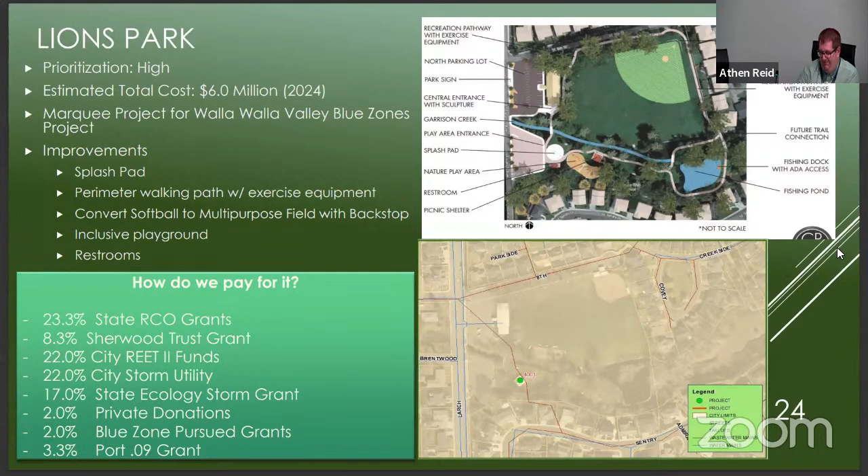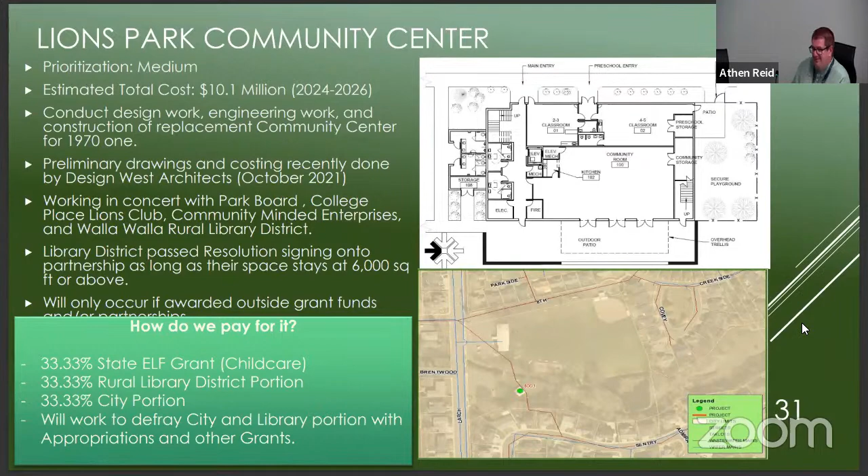Believe it or not, it looks like this is actually starting to come together with the various buckets of grant money. So that is the concept to replace the community center with something that really represents the current needs. Next slide.

Next slide. Then full corridor projects, this means the pavement's getting redone as well as the base, as well as a utility or two. Next slide.

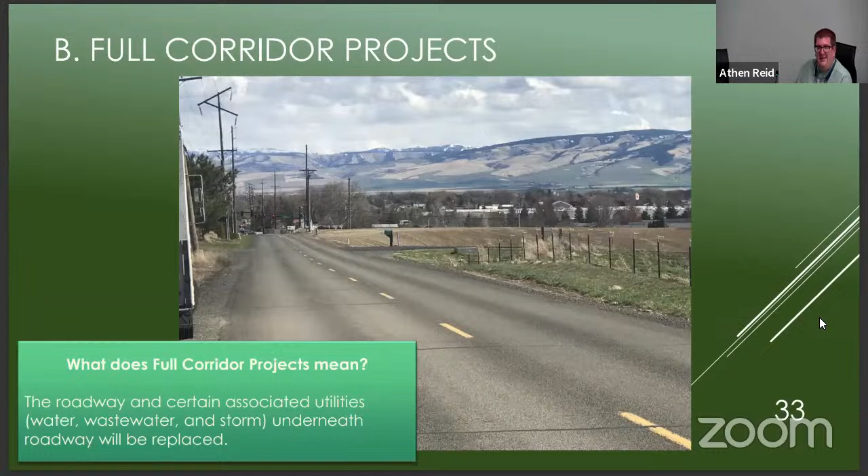Mojonnier Road, this is going to be the big heavy lift, and this one will be over the next 2 years. We're getting close to final engineering. We'll be teeing this up for right-of-way acquisition next year and to bid out construction. This will include normal travel lanes, curb and gutter, bike lanes, sidewalks, and some street lamps.

And then we're using some tax increment finance money, a surface transportation grant, and tying into the congressionally directed spending I mentioned earlier, we did get about $2.5 million earmarked from Representative McMorris Rodgers. So that'll come together over the next year or two. Next slide.

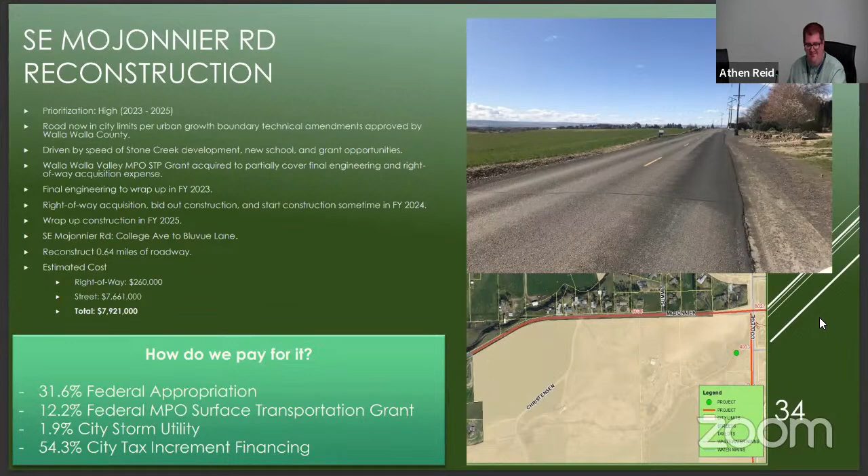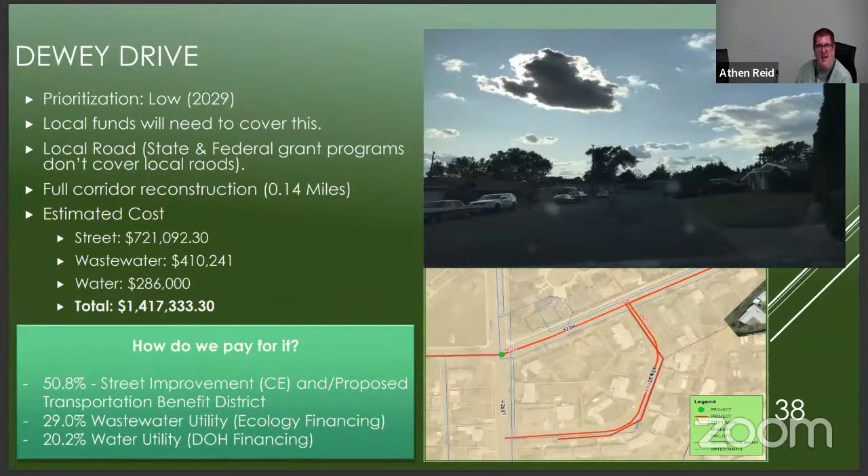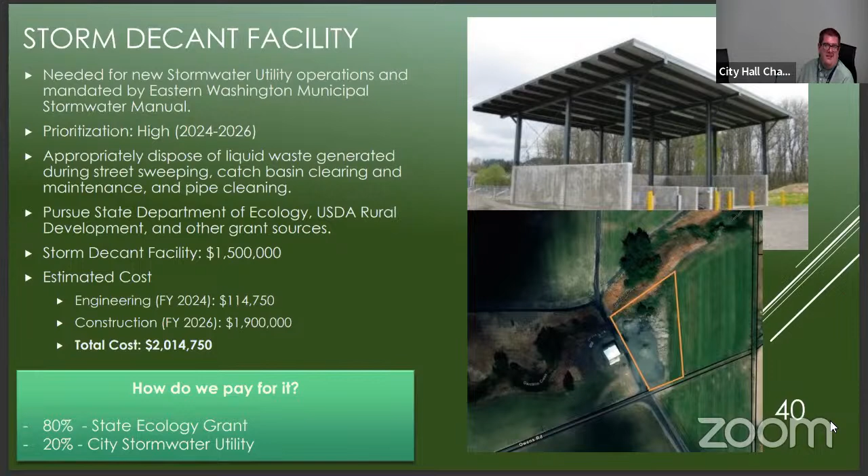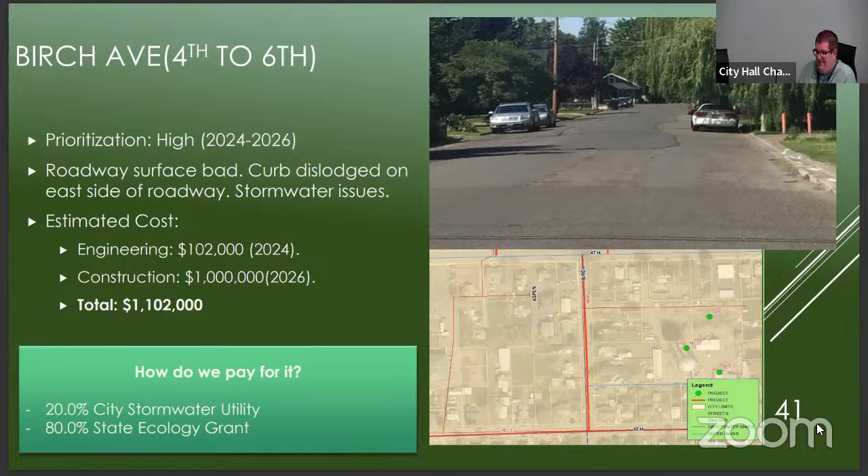Birch from 4th to 6th: engineering, we need to handle that, and then get to construction and put in sidewalk on that roadway as well. And then deal with some of the stormwater issues, because we have a creek that goes through folks' backyards and isn't properly mitigated at that roadway.

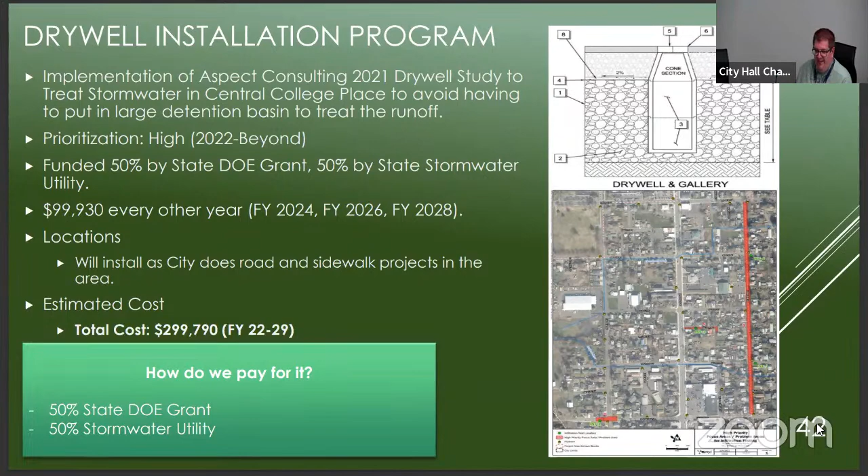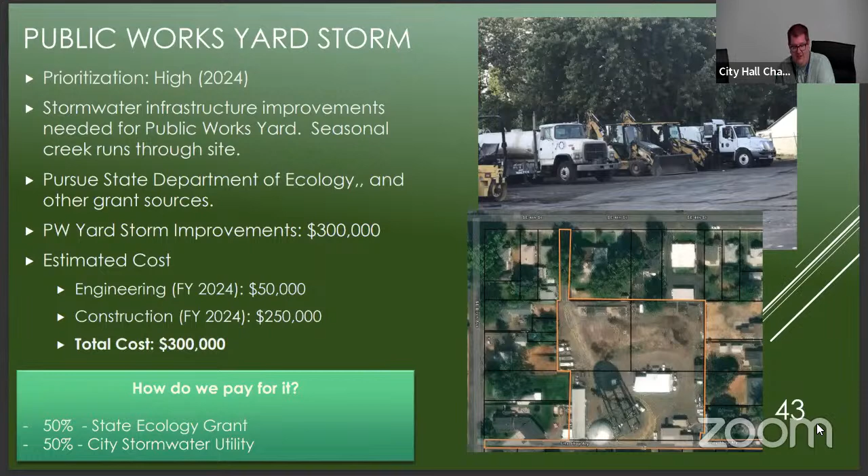For the Public Works Yard stormwater, this ties with Birch Street. This just needs to be treated—a lot of our heavy equipment is back there. So again, we're positioning this for next year to begin and remediate it.

Northwest Earl Lane: a couple of years ago, we redid Destito Court off of B Street, and we thought it was going to mitigate stormwater. However, we realized that a lot of stormwater is also coming from Earl, so this needs to be mitigated as well.

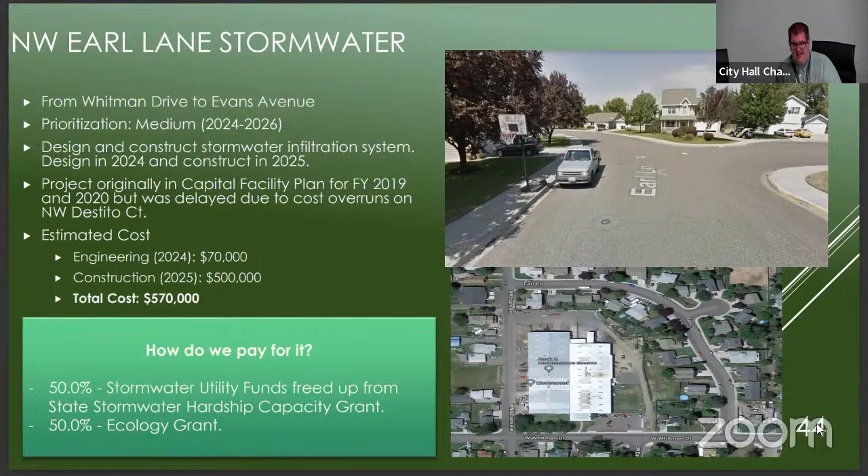And as you can see, we're getting a lot of grants for this project.

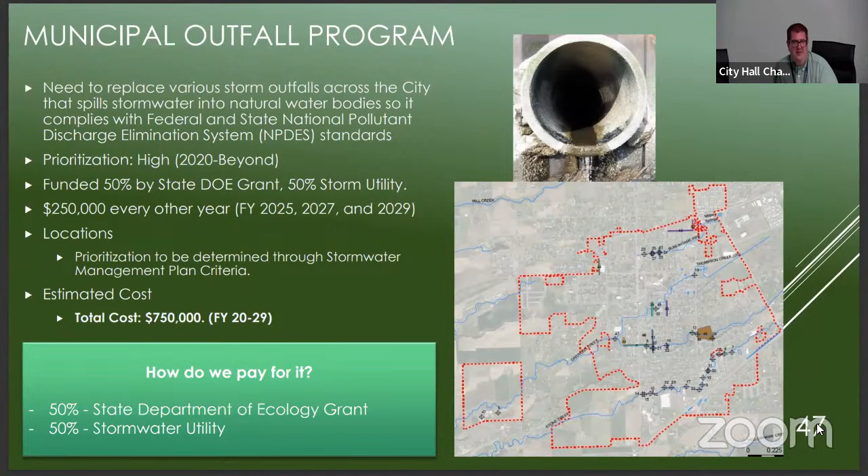Next slide. The outfall - we have roughly 80 outfalls across the city, and we're trying to get one every other year treated because the 80 outfalls didn't have filters on them, and they should have. So now we have a permit. We're trying to whittle that down every year, but they're expensive - each outfall is $250,000 to remediate.

Next. Now, street projects - this is mainly just dealing with pavement. Next slide. Chip seal - we put the rocky material on the roads, and we partner with the county to do this because we're able to get another 10 years of life out of them. We've done this as a stopgap because since we didn't really have a funding mechanism for streets, at least the local ones, they were at like a 260-year replacement schedule. So you do what you can to keep it going.

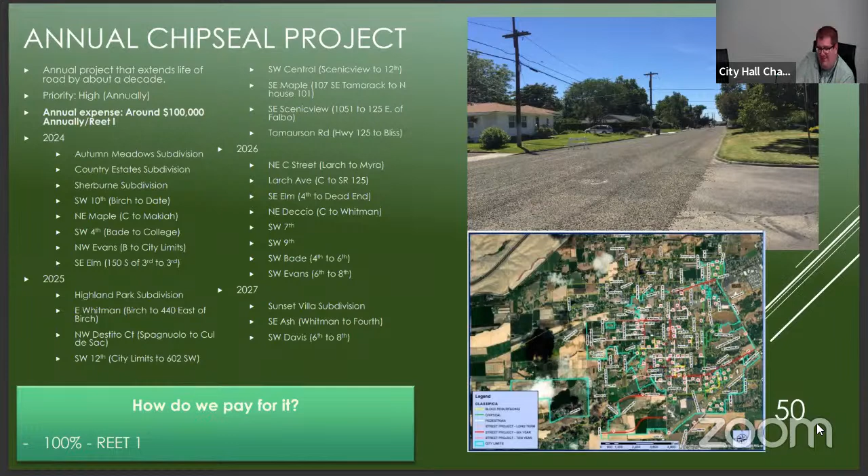So for 2024, you can see we would chip seal Autumn Meadows, Country Estates, south area of town. 2025 would be Highland Park area, and then Destito and Southwest 12th, Maple and Scenic View. 2026 would be Northeast C Street from Larch to Myra, the totality of the Larch corridor, and then Southwest 7th and 9th, and Bade and Evans. And then 2027 would be Sunset Villa, the manufactured housing park up there, and then Southeast Ash from Whitman 4th and Davis from 6th to 8th. And that's funded by our real estate excise tax 1.

Next slide. This block resurfacing program is predicated on a transportation benefit district revenue. We've had an unfunded one for a number of years. If it did pass, this would be a 1/10 of 1% sales tax, which is less than Walla Walla's 0.2%. But in this case, we would then start to actually whittle down some of these local roads that we're having problems replacing and fixing.

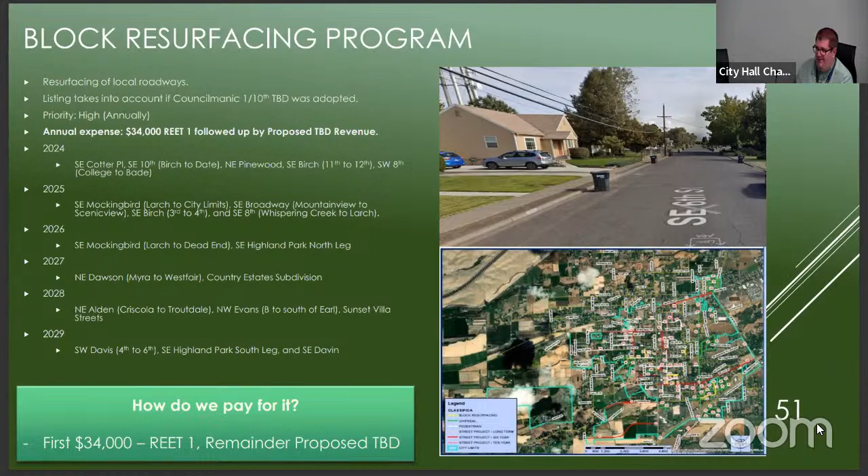So you can see in the cycle here, we have it where we have 1 or 2 blocks of streets we would reconstruct, and then another 1 or 2 blocks of streets we would engineer for the following year, and then essentially keep going in that fashion. You can see the estimated breakdown, and that's completed by a pavement management report that was done earlier in the year.

Next slide. Safe Walk College Place - this is the initiative to try to get sidewalks in the areas of town that have no sidewalk. So again, with the Transportation Benefit District, trying to use that as a local match to get some community development block grant funds, because the area around College Avenue between Academy Way, Birch, Rose Street, and Sunny is actually deemed low moderate income by HUD. And then you can actually get community development block grant money to do projects.

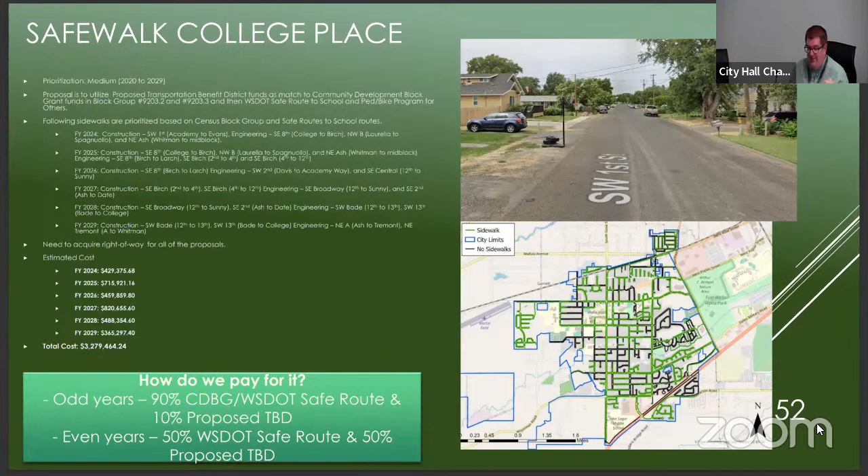So you'll see here that in essence, all these projects are scheduled where, again, we're trying to tee up a block of road for a sidewalk on one side - construction - and then a block of road for engineering, and keep going along that. Next slide.

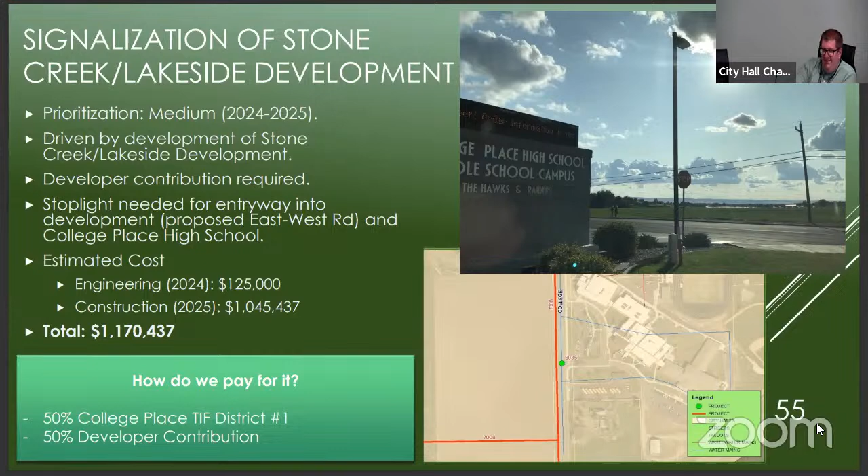Signalization of Stone Creek. With that new development going in across from the high school, that's actually going to facilitate another east-west road to go across that property. We'll be partnering with the developer, but that road's going to have to be a little oversized because the public school district bought land to the far southwest, and it looks like they eventually want to do some sort of intermediate school out there. So there is some exposure on that, which is why we have tax increment financing helping to pay for a portion of it.

The east-west road—you can see the bottom part of that map. There's the road that goes from east to west and it would connect all the development together. The developer is going to be building the majority of it, but since some of it has to be oversized for the eventual new school and potential commercial development, that's why tax increment financing is paying for some of that. We estimate that putting this in early matters, because a lot of the little roads would be built off of it, their expense coming years later. That's why the east-west road has to go in early.

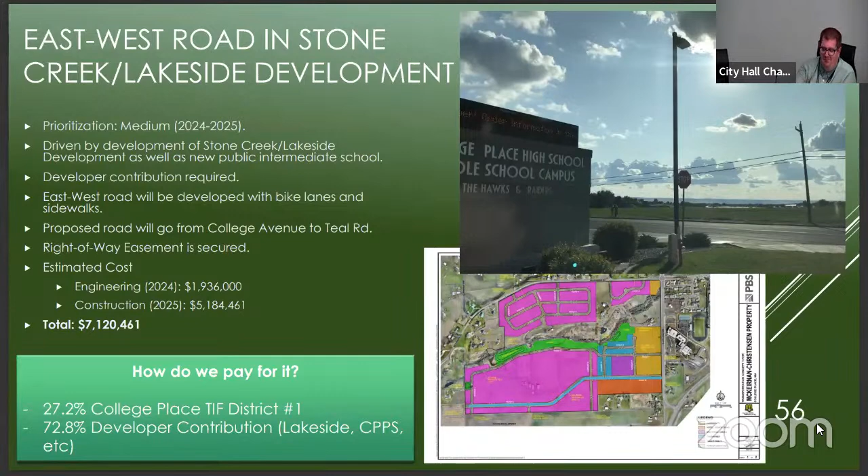We're also getting some out-of-cycle grant money from the state to fix up roads between Carey Court and Lambert, because next year the city of Walla Walla is doing a road diet on their portion of Rose Street. You'd have a situation where it would go from 3 lanes and bike lanes to 4 lanes, then back to 3 lanes with a multi-use path. So instead, we're going to try to make it one fluid sequence between the two jurisdictions.

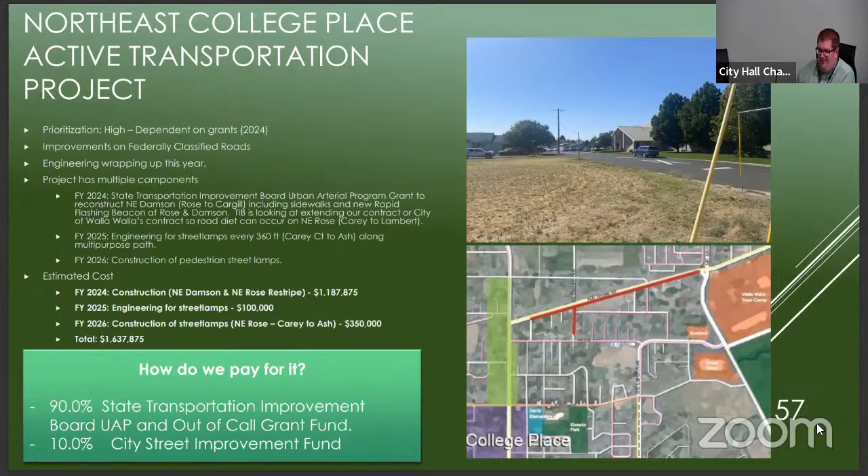And then Public Works yard replacement—again, we're just starting to investigate this.

So we're doing a facility study, and then a couple of years out, trying to get grant money and make it happen. When the older generation worked in Public Works, you could have facilities that were very old, but now it's hard to retain folks because some of the buildings out there predate the city being incorporated, and it's actually converted chicken coops. The Public Works folks are working out of it, that yard under the water tower.

And then Autumn Meadows, getting those roads up to city standard now that that subdivision adopted the local improvement district, so we could take it over as public roads.

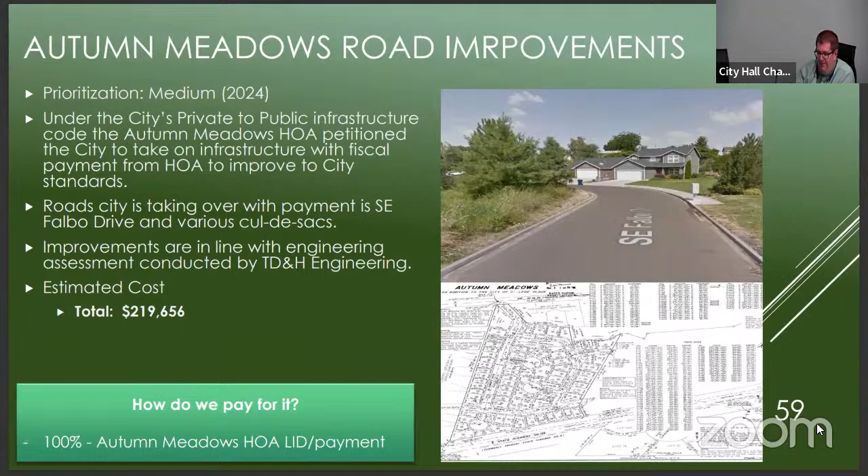And then Ash, we're doing a study on the other that will go on through 2024, figure out how maybe better reconfigure it with all the activity from the university and Davis School.

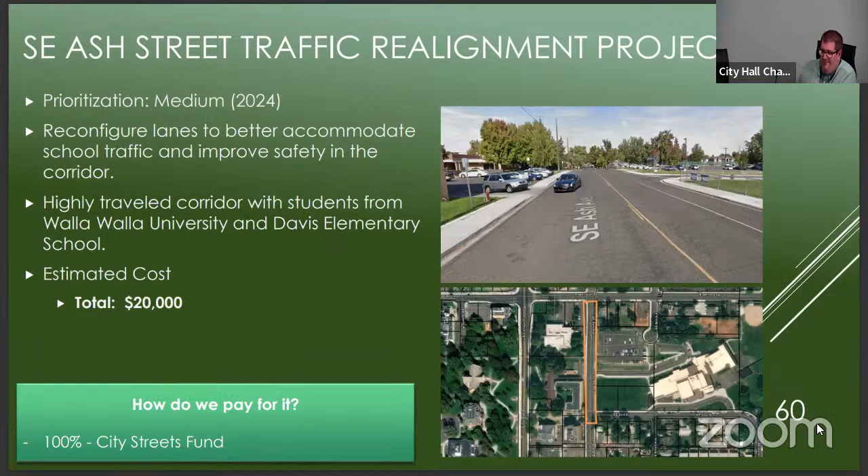And then Lambert and College, we're trying to earmark some money to put a guardrail up at Lambert and College Avenue, because over the years, through various accidents, a number of vehicles have gone at or over the retaining wall over there, and we just had another one, so it's going to be a major issue.

And then Whitman Home Depot, this is a newer project, but Myra Road, we don't own Myra Road from Rose to State Route 125. The city of Walla Walla does.

And there's a potential development going on the property south of Home Depot, but it needs a right turn in and right turn out. And our neighboring jurisdiction is politely squeezing us a little bit on that, so we may need to look at alternate options.

One option is to put a traffic circle in at that back entrance of Home Depot, because the problem is the entryway going to that property across from Home Depot right now is a pork chop, so it doesn't facilitate full movement. This is a newer project, but we put it in because otherwise that deal could potentially go south, and really, unless we get some additional movement in there, getting development on that property is a challenge.

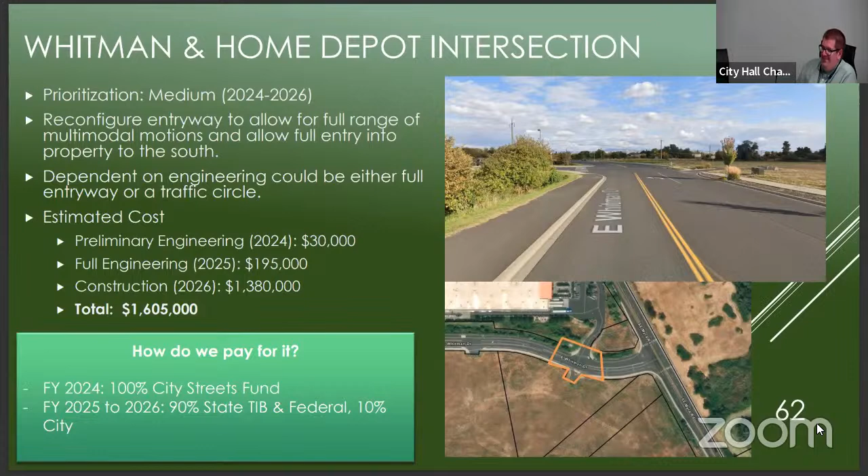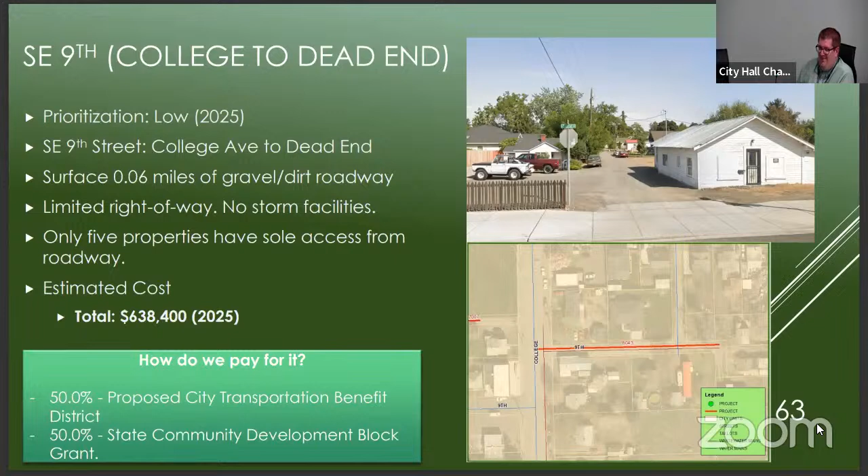Southeast Ninth, again, trying to program some transportation benefit district money and match it with CDBG money. This is the only unpaved road in the city, and it has rock and dirt in it. So we're actually trying to put a paved surface in there. It's right off of College Avenue.

Then Garrison, Village Way, and Myra Road. We've been getting a lot of requests over the years, given the number of residents in the villages and folks trying to get to Fort Walla Walla Park, to facilitate safer movement across Myra Road. So we're trying to work with our neighbors to get some grants and input a stoplight or something to facilitate safer movement around that area. So we have that in coming years, just because of where it's at, it's a bit of a challenge to get grants for it, but nonetheless, we will try.

This one is important really recently. It wasn't as important back when Homestead wasn't around in the county and didn't have that multi-use path going out to Whitman Mission. But now that it does, Whitman Drive's getting a ton of traffic, and that multi-use path is starting to be more and more important. So there's a 1.5 block portion that has no multi-use path, bordered by areas that do.

We did get a grant to do engineering and some right-of-way acquisition on Whitman between Davis and Academy Way, because half that block just ends and then there's nothing. So we're trying to position us so we could get additional grants to fill the gap and have a nice multi-use path the whole way from Myra and Fort Walla Walla to Whitman Mission.

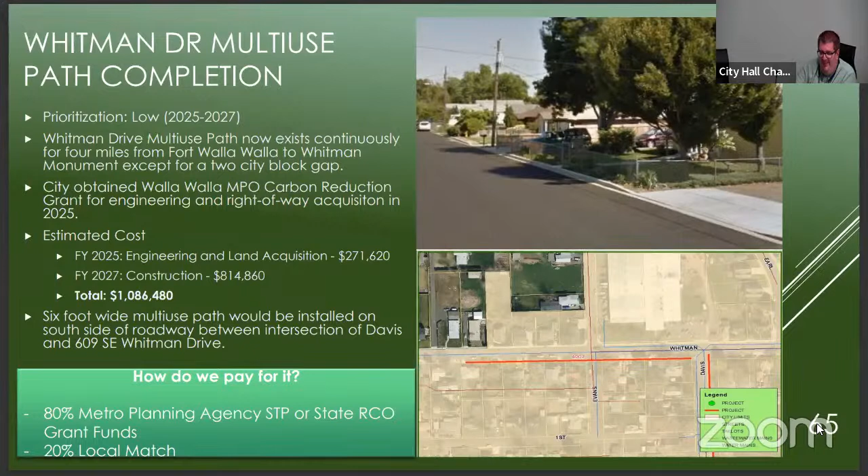And then Whitman Drive improvements. When the south half of the roadway was improved, that was done at Hayden Homes' expense, but then the north side was the old county chip seal, and it's starting to deteriorate.

So trying to do a full scale replacement of everything a couple years out, and it may be bumped up as stuff happens out by Martin Airfield and also future grants.

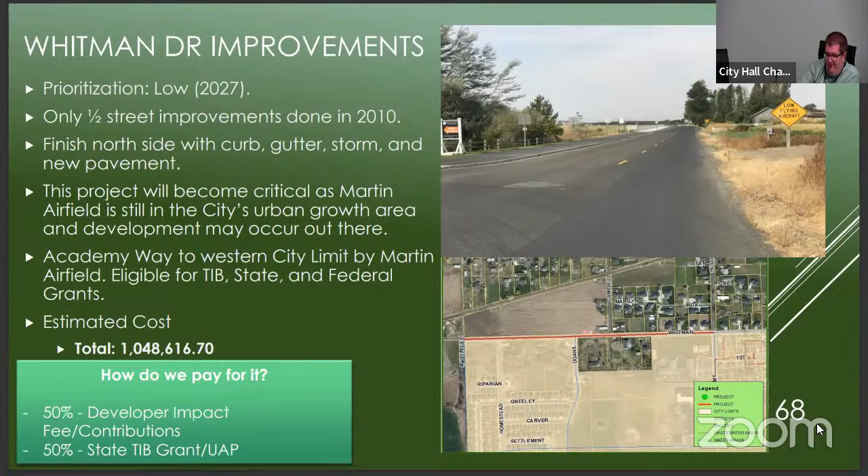Now we get into wastewater projects. Wastewater treatment plants. Per our state permit, it has to be dramatically updated. So we end up getting a grant and loan offer where you can see the proportions, but it's a very expensive project, about $20 million. But we're getting earmark money for it, and also state ecology hardship grant and loan dollars to get this thing done. It'll be done over the next 3 years.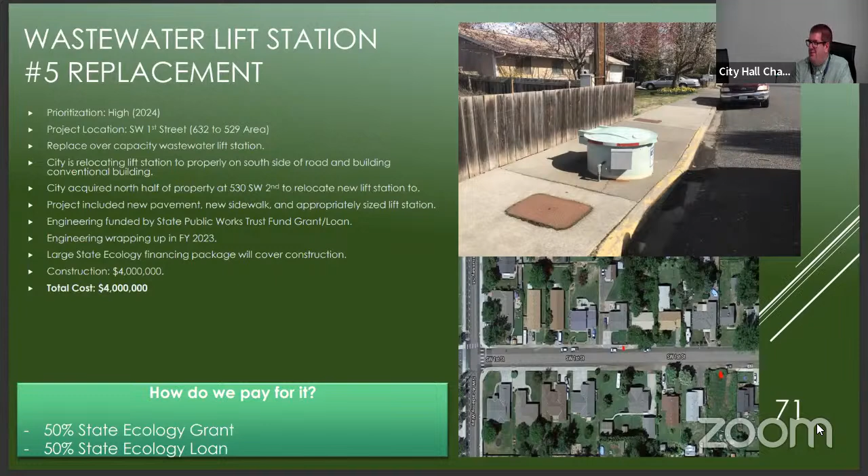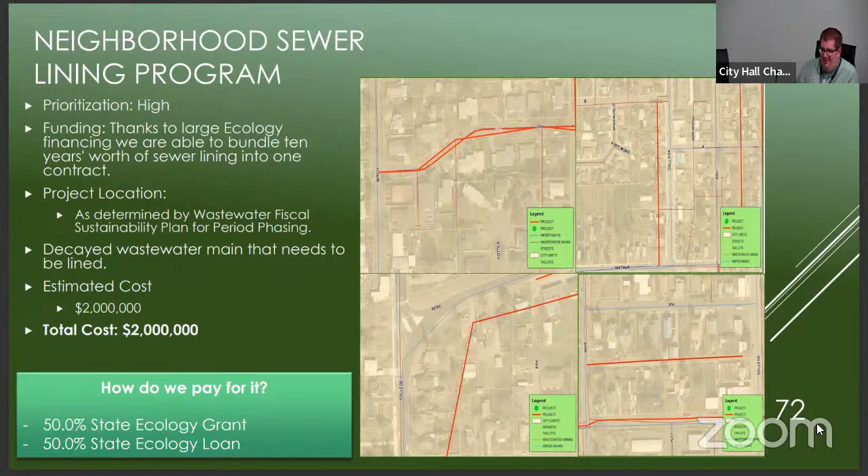And then also the state is part of a financing package. Every other year, we usually group sewer lining projects together to work on them because it's hard to get contractors to want to come out here if you have a limited amount, it's a challenge. Luckily, the state gave us money where we can do 10 years worth at one time, so we'll really be able to get nice and caught up. They'll be going on next year as well.

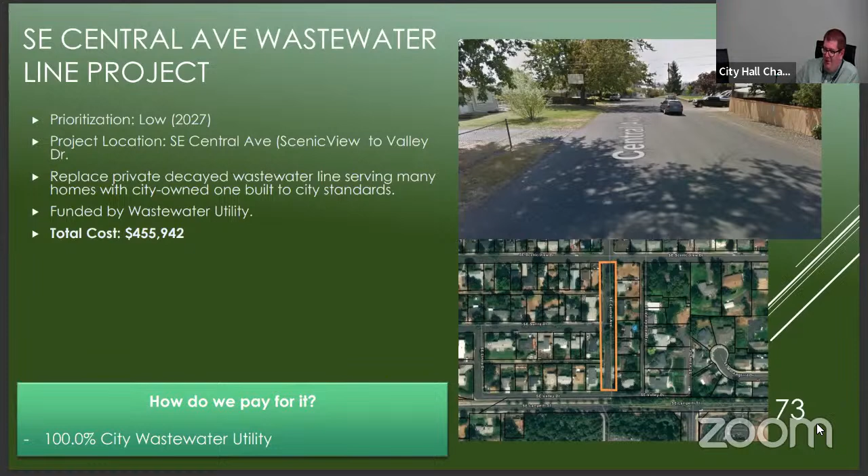And then the last wastewater project, Central Avenue, a couple years out, building a public wastewater line, because right now there's a private line that serves a bunch of homes that are failing. So we're working on doing a public line and then fixing the road as well.

Then getting into water projects. The new well that I mentioned - for all well projects we've been working on over the years, we recently only got to a number of wells that we had like 7 years ago. Meanwhile, development has occurred, so this would be the first additional well for additional capacity. We're drilling it right now, and then again, the well house design basically next year, and then starting to construct it next year into 2025.

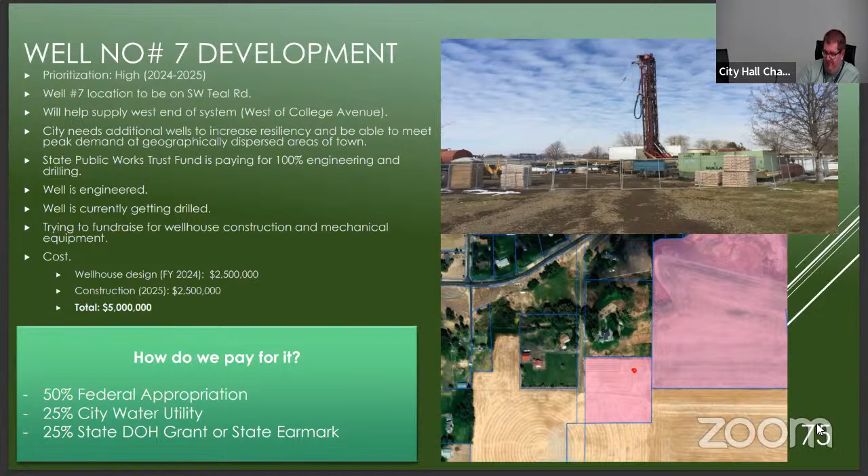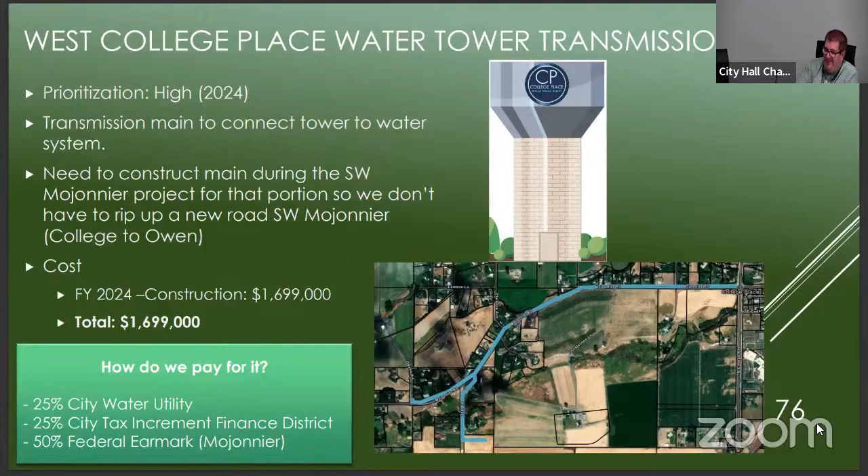West College Place water tower. We need a transmission main to get out there, so this will occur while we're doing Mojonnier Road, so we don't have to rip it up again and can take advantage of gravity and not have to build expensive pumps. The idea is to put the water tower out on some land at the wastewater treatment plant, so at least put the pipe in next year as we're doing Mojonnier.

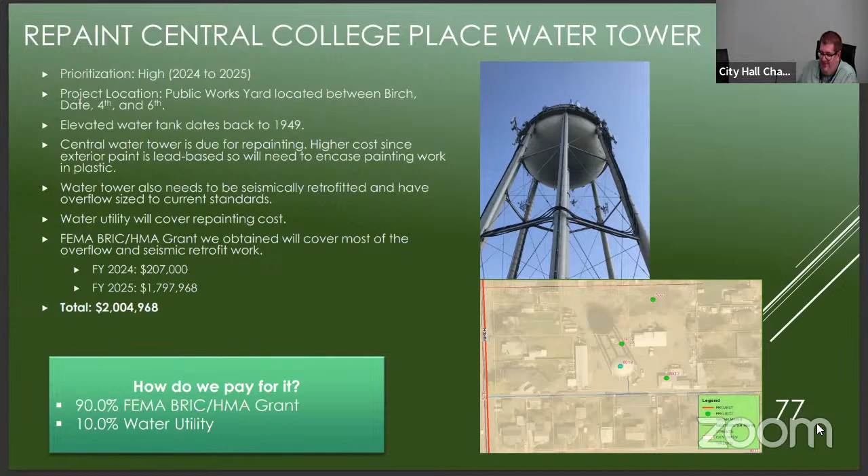The College Place water tower - that water tower dates from the 1940s, and we need to do some additional reinforcement to seismically retrofit it and then repaint the exterior. The state finally found our grant agreement - they lost it for 5 years, but found it finally, so we'll be able to work on that. That'll be going on all through next year.

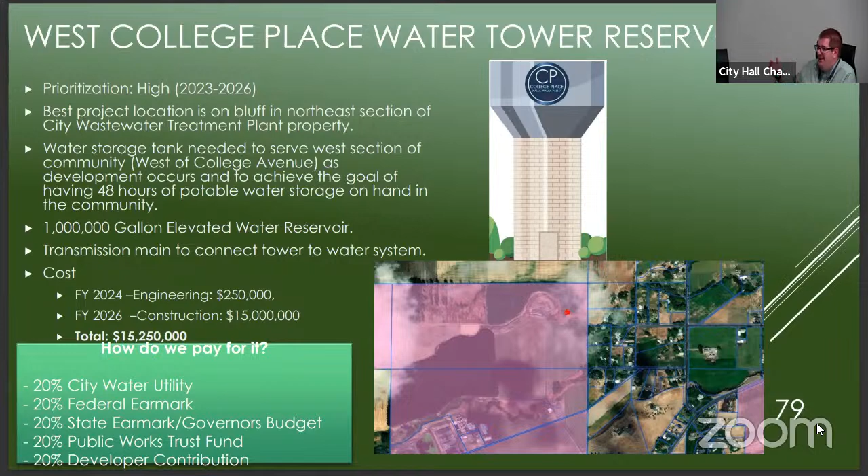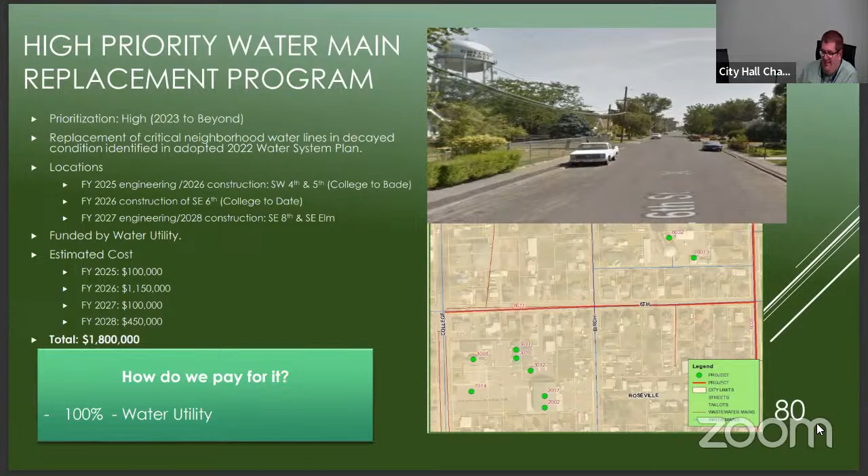A lot of this we can do with utility funds. Next slide. And then medium priority water main replacement. This is as funds are available, and it's just some areas where they're starting to deteriorate, but not at a significant level, but we still need a plan for them. So around Lambert 8th and then Robin, and we have that program for water utility funds.

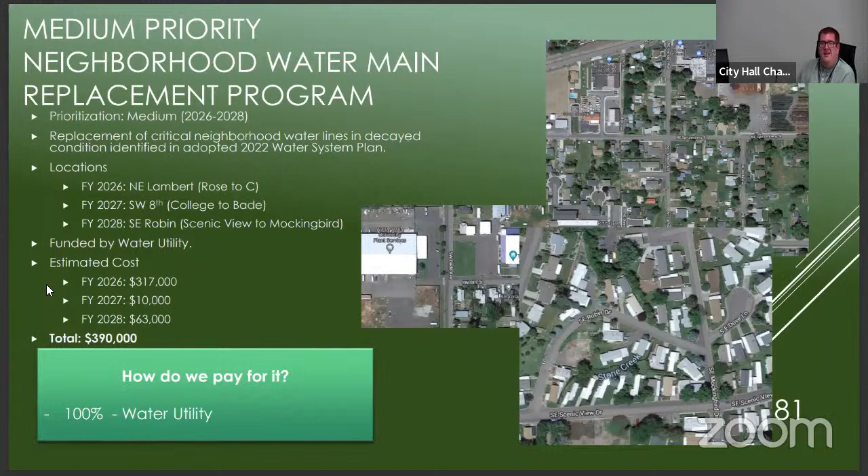And then next slide. And then that is a table of acronyms. So with that, that is the general list. Is there any comments or questions or thoughts?

Is everything in the PowerPoint part of the budget? Yeah, the 6-pager. So we have it on the website, and then what ultimately goes in the budget is there is a 5-page spreadsheet that just has the simplified portion, but council likes to know where this stuff is at and what it is. So this is the detailed 6-page PDF. Okay, thank you.

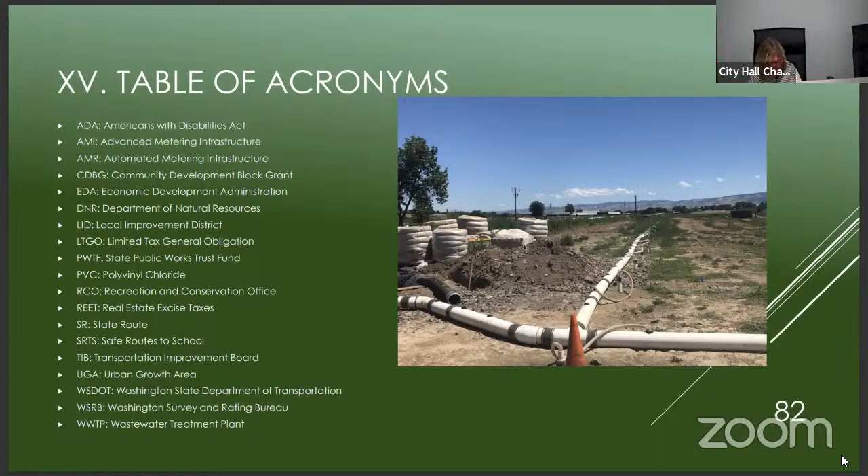All right, any other questions, comments? Good information, Mike. Thank you. Let's move on to our 2023 development update by Mr. Rizzatello, please.

Okay, thank you. Not much has changed from last month, but I just want to go over it since we have new members, just to demonstrate what we do with the reporting. So every month we report on developments that are ongoing, or ones that we are starting to essentially try to get to come into the city. With some of them we can say who they are, the other ones we can't, so we give like a project name to try to hide it. But if you see the name, you can usually connect to them too.

So Chipotle, that one is going. They're open now. Project Inspire - this is the other tenant that's going to take the other half of the building, so that's another sandwich tenant going in adjacent to them. We're pretty excited about that. Across the highway, by the end of the year, we should have Burger King open, and that's going in right next to Aspen Dental.

Then Project Bed - this is the Whitman and Myra project. This one is interesting. If this comes to fruition, this would be a hotel and convention center that basically would rival Marcus Whitman Hotel. So we're really looking at that one. Where is that located again? Right behind the Home Depot. Okay, yep.